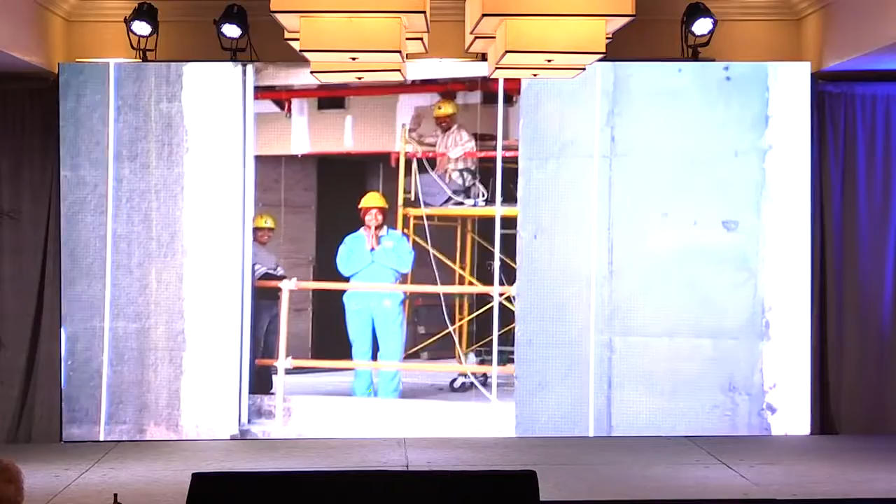Here we go. I'm now 1,000 feet from the surface, 2,000 feet. I'm now deeper than the Grand Canyon. I'm now almost at 8,000 feet. And I'm standing at the deepest point on planet Earth. I think this is the most incredible thing I've ever done in my life.

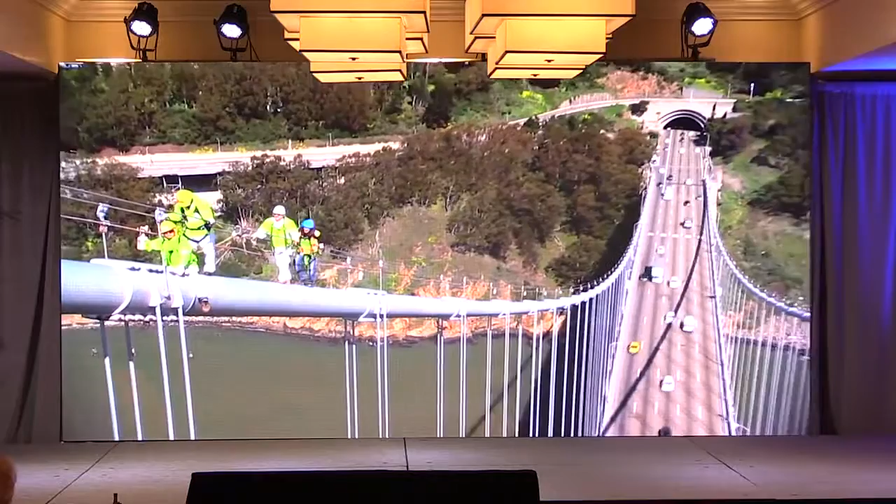My name is Danny Forster, and this is Build It Bigger.

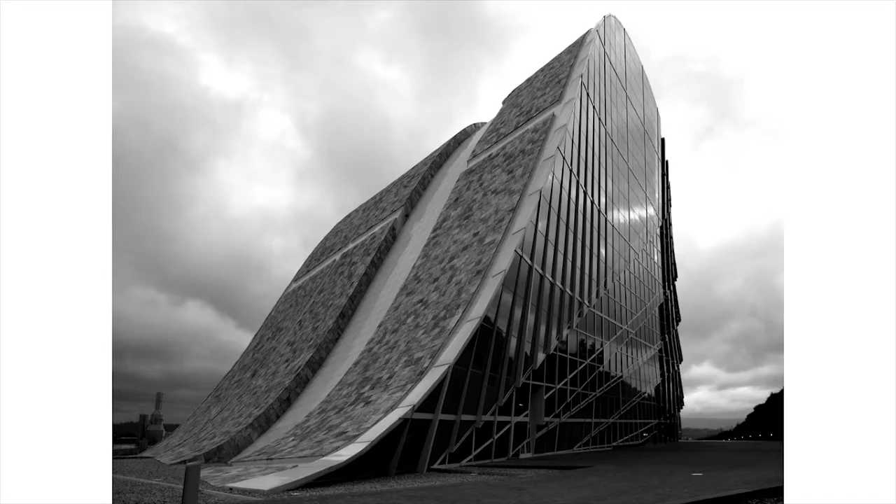This is a project designed by Zaha Hadid in Baku, Azerbaijan. Been to great places like Santiago de Compostela. This is the city of culture designed by Peter Eisenman. And this is one of the longest cable stay bridges in the world in Hong Kong. This is the Stonecutters Bridge.

Now, the show at its core isn't just about showing the biggest and the tallest and the deepest and so forth, but rather it's about actually getting onto the buildings and physically understanding the how and the why, how the engineers and builders ultimately execute these projects and why they look the way they look.

One of the things that we feel very strongly about is understanding how a building is inextricably tied to its place. The culture, the climate, the economic context, the sociology, and so forth. How is architecture a direct result of the place in which it's built?

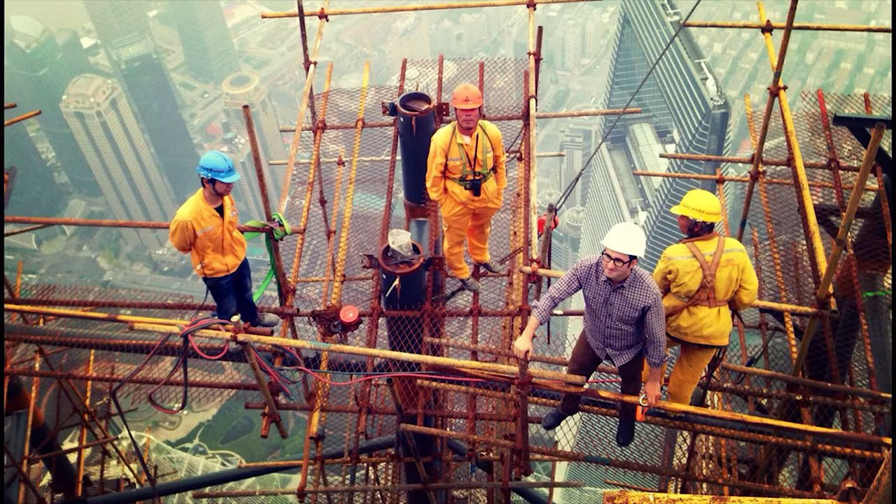A project we did in Shanghai, for those who've been there recently, this is the Shanghai Tower. It's the third of the 3 towers in Pudong in downtown Shanghai. It is the tallest building in China at 2,000 feet tall. And this is an image of us filming the episode. And as you can see, while China has great innovations, they are still waiting on OSHA to arrive.

Just for background, that's the Shanghai World Financial Center. The building looks like a bottle opener. That's 1,650 feet tall, and we're looking down on that building. So that's about 2,000 feet tall. And they're looking forward to getting harnesses at some point in the near future.

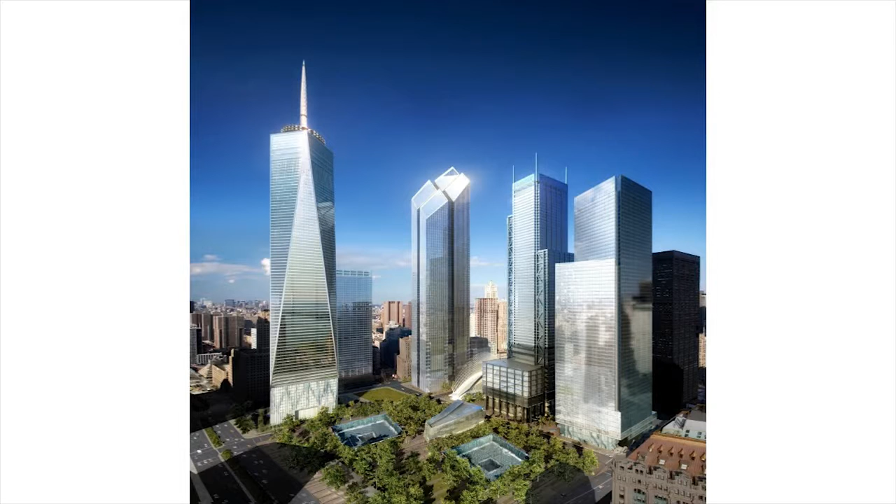In addition to being in front of the camera, I've had the opportunity to spend some time behind the camera. And a few years ago, got to create a documentary series with Steven Spielberg and the Discovery Channel called Rising, Rebuilding Ground Zero, which is a 6-part film that looked at each of the major projects at the World Trade Center site, explaining, again, not just how these buildings were built, but why do they look the way they look? What meaning is embedded in the design of these buildings that make them inextricably tied to the event of 9/11 and also the development of a new Manhattan?

And just by way of example, one of the episodes looked at Santiago Calatrava's transportation hub. Now, who's been to this building here? Who's seen it in New York? Been through it, right? Amazing, slightly overpriced, but very beautiful building in downtown Manhattan. But have you asked yourself as you walked by it, why does it look the way that it looks? Said more specifically, look at the wings on this building. Pretty asymmetrical, right? Why go to the trouble to design a $4.5 billion train station, crank the building off the New York City axis, which produces asymmetrical ribs in the ceiling? Why do that? Any thoughts? Anyone?

Seemingly arbitrary, right? Very expensive choice. Well, if you look at the building, you can see it's been cranked at a slight axis, thereby putting it too close to its neighboring building to the left, which produces short ribs on one side and very long extended ribs on the other side, which is beautiful.

Now, the reason the ribs are cranked the way they were is because this isn't just a train station, but it's the transportation hub at the World Trade Center site. And so while every day during the year these beautiful shadows come into the space, they wanted a memorial in light, one that could never be changed. And if we remember 9/11, the sky was so blue and clear that day.

And so every year, heretofore at 8:46 a.m., which was the time at which the first plane hit the first tower, when you enter this building, instead of seeing shadows as you do at an angle, every single year for just a moment, shadows inside of this building will be symmetrical down the center of the spine of the building just for that moment, and then it will go on the rest of its day.

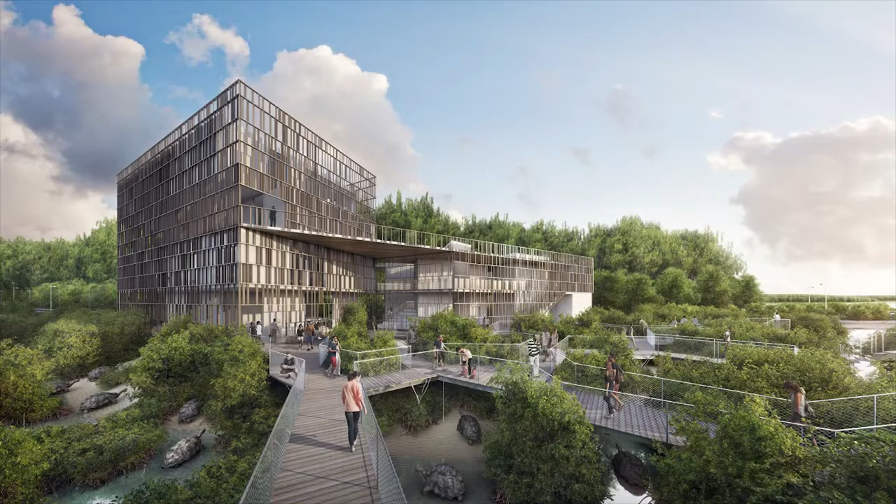Now, in terms of the work that we do architecturally, which is what I'm going to talk about today, my practice does a wide range of work from cultural buildings. This is a museum of environmental history in the Seychelles. This is a museum of ethnography in Budapest.

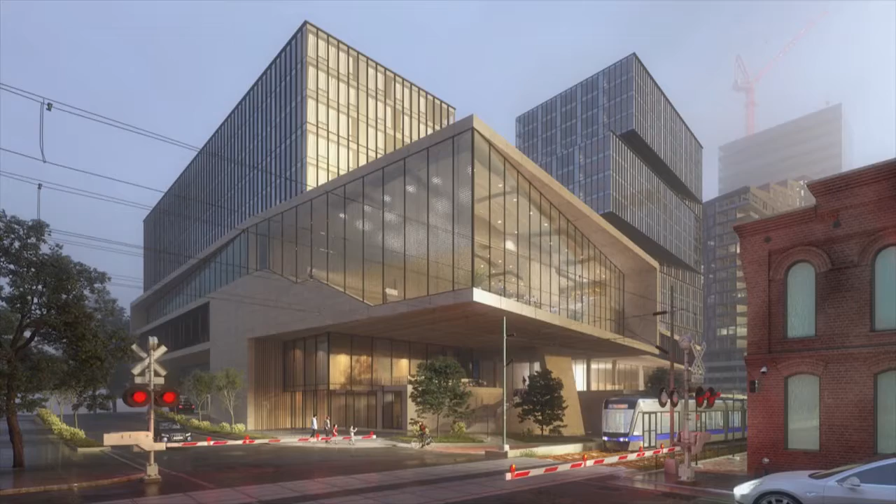This is the first building in a very large 11 million square foot master plan in downtown Charlotte called First Ward, which is under construction right now. We do housing and a whole host of stuff, but our practice has really focused on hospitality the past 7 or 8 years.

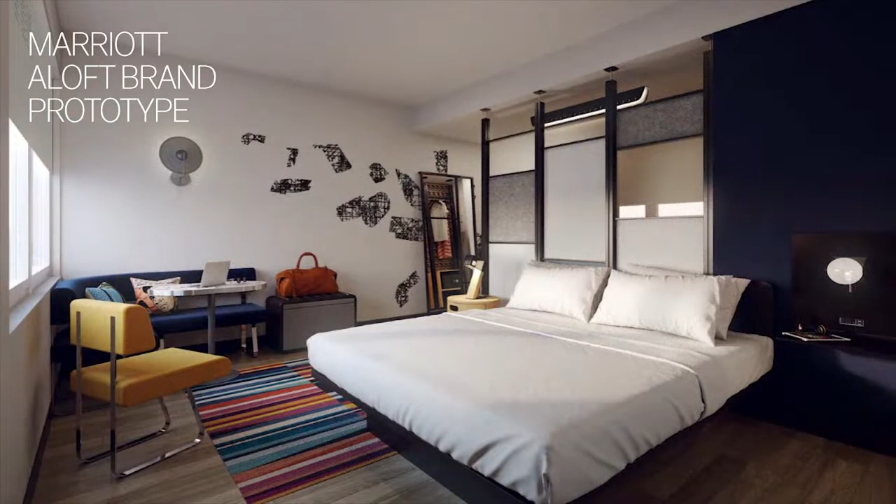Recently, as Michael mentioned, with the acquisition of Starwood and the Marriott merger, we were really honored to be invited to take the Aloft brand, a 10-year-old hotel brand, and reimagine it, create a new prototype, and relaunch it. And actually, we're building now the first brick and mortar one right now, but all Alofts are part of the Generation 4. This is a design that we created.

But what I want to talk about is take a slightly deeper dive into 3 projects right now, 3 hotels in New York City, and really talk about our journey to modular. Not to say that it's the greatest thing, it's faster, it's cheaper, it's the future, everything's fine, but to kind of show you how we honestly came to arrive at being modular architects and be candid about the struggles that got us there.

This is a project we completed about 2 years ago. Very proud of the building. It's the World Trade Center Courtyard Marriott. Won the ALIS Award for Best Development 2 years ago. Sold shortly after its opening. Kind of interesting, compelling building just south of Tower 1 of the World Trade Center.

So there's Tower 1, there's Tower 4. Just south of Tower 4, if you look, there's our site. So we like to think of ourselves as Tower 4.5. And I say that kind of affectionately in the sense that for us, it was a real important opportunity, yes, to create a great hotel, but to find a way to connect this building to the master plan of the World Trade Center site and make it part of that campus.

And the way we did that was, in a sense, saying the World Trade Center ends here. And we literally designed the building to have a very austere stone south facade that said, that's old Manhattan and that's new Manhattan. And there's our building that defines that southern edge of the campus. You can see it right there, quite literally.

We've got kind of relentless square windows on one side and a very, very different facade to the other side. So the building sort of speaks 2 languages, old New York to one side, and then a very dramatic, crisp, taut window wall looking to the north.

You'll notice the building cantilevers over its adjacent neighbor, which for those of you who build in tight urban areas, we oftentimes come up with crazy gymnastics to get an additional room into the plan, right? We call it FAR, floor area ratio, but at the end of the day it's how much real estate can I squeeze onto the site to raise the profitability of the building. It's that simple, right?

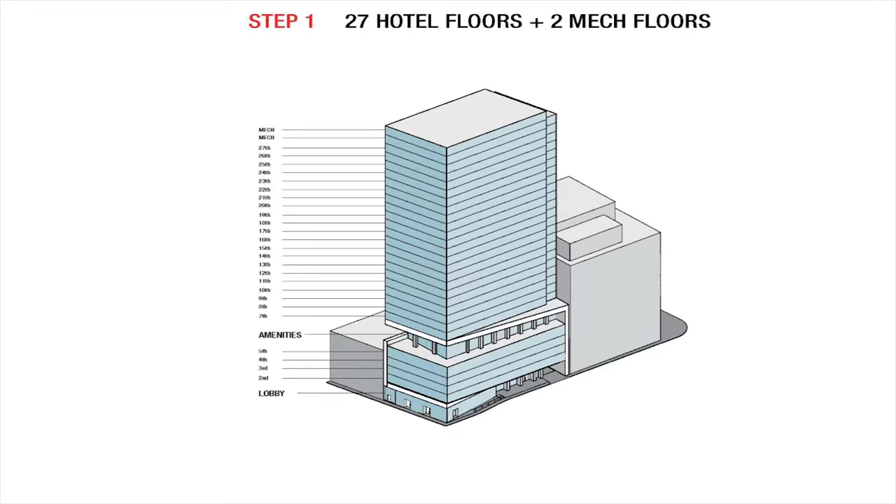Then you can set the building back. Once you set the building back, it makes for a nice, slender, elegant, efficient hotel tower. But the problem was our podium, the first 5 stories of the building, were really fat. And big, fat, long hotel rooms don't make more profitable hotel rooms. They just oftentimes can be wasted space.

Quite specifically, if you look at the plan of our rooms on the south side of the tower, we ended up with a queen-queen or double-double condition that had a 345 square foot room, which I'll be honest with you, in New York City, that's too big. We get away with murder. We've got the Bowery Hotel here. The Pod Hotel, you can get away with 86 square foot hotel rooms.

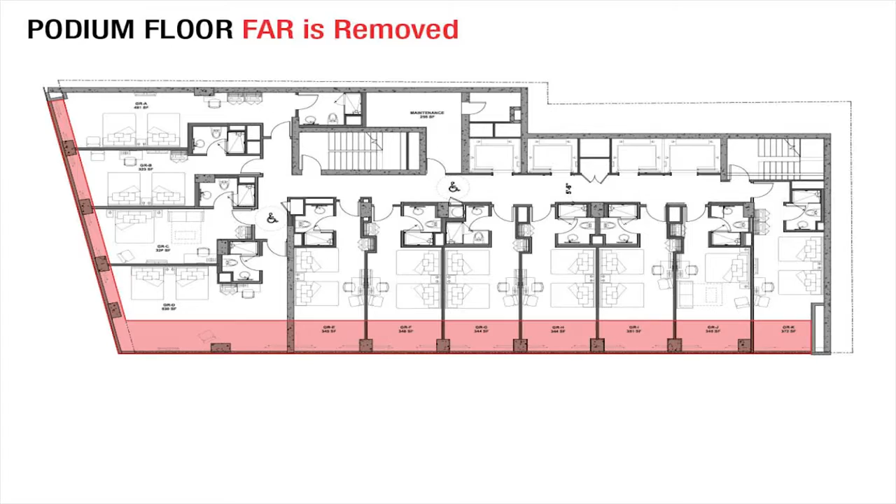But my point here is the argument was made that could we find a way to compress the hotel room, to actually pull that room back and not use up that real estate? Well, the problem was it's against the law.

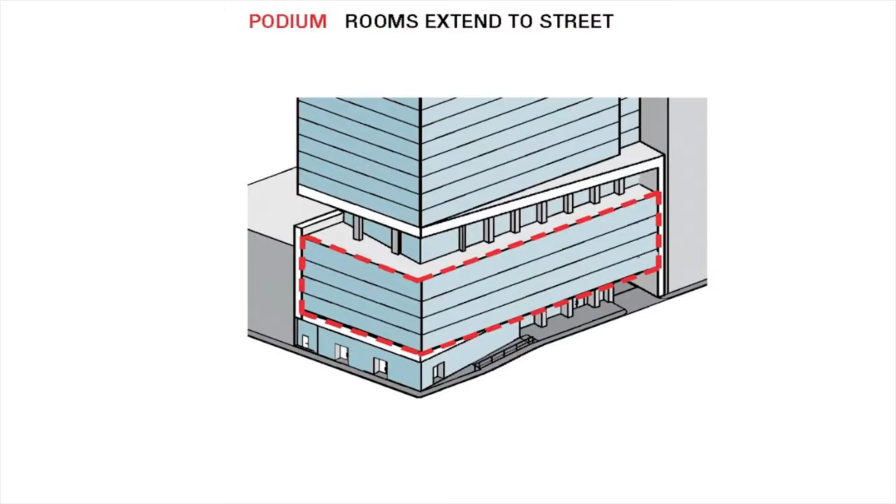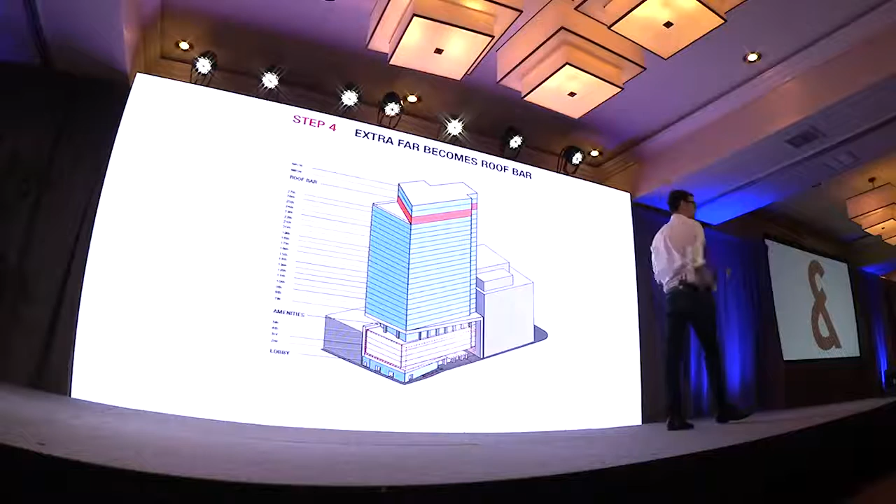So what do we do? We chopped that bit of real estate off just a little bit from the west side of the building, and we said, okay, if we just took that real estate, that 3,500 square feet, and we yanked it off the building, reshaped it, put it on top of the building, set the building back, you could create an amazing rooftop experience with a triangular outdoor space with an incredible view of the World Trade Center memorial pools. That would be great.

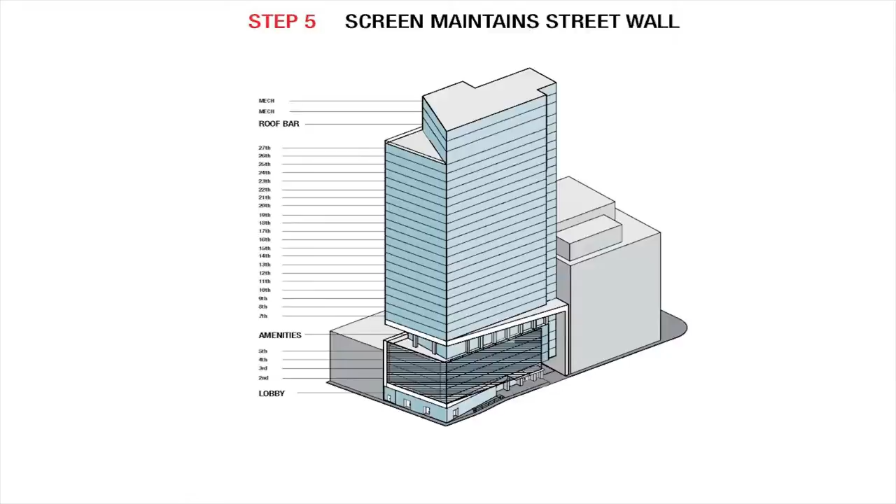The problem is, we've just broken the law because the city says you must hold the street wall. The problem is the city also says if you put a wall there with a hotel room behind it, that's not legal light and air, that's not a hotel room. So our challenge was, how do you produce something that is both a window to one group and a wall to another? Literally two diametrically opposed things.

And what we came up with was this. It's an algorithmically generated cantilevered screen wall made up of mesh. The mesh is 50% opaque and 50% transparent. There's 50% coverage of the mesh, therefore 50% open. So one group said you can't be more than 50% covered. One group said you have to be no less than 50% covered. Turns out we had one solution that satisfied both groups.

It's an interesting, bizarre way to wrap the bottom of a building. Produces a kind of interesting design. Each and every single piece was subtly shifted such that every operable window still has clear access, so you can still take your Instagram photos. And in some cases, you could make the argument that it's a kind of interesting architectural detail from inside of the rooms. Now, I show this just to say that it worked.

It took 6 months. If you try and apply for a screen wall in Manhattan right now, the Department of Buildings has like my face on the wall and will say no. And I say that because this is a bit of a unicorn.

We did it once. We as architects were able to make a good building that followed zoning, that helped our owner get more additional FAR, add rooms, add a rooftop bar. So as architects, we could participate in the process beyond just making it beautiful or effective or operationally sound. But this is hardly something I can do a second time. We did it once. So how do we then, as architects, find a way to contribute to the bottom line beyond just making the building work?

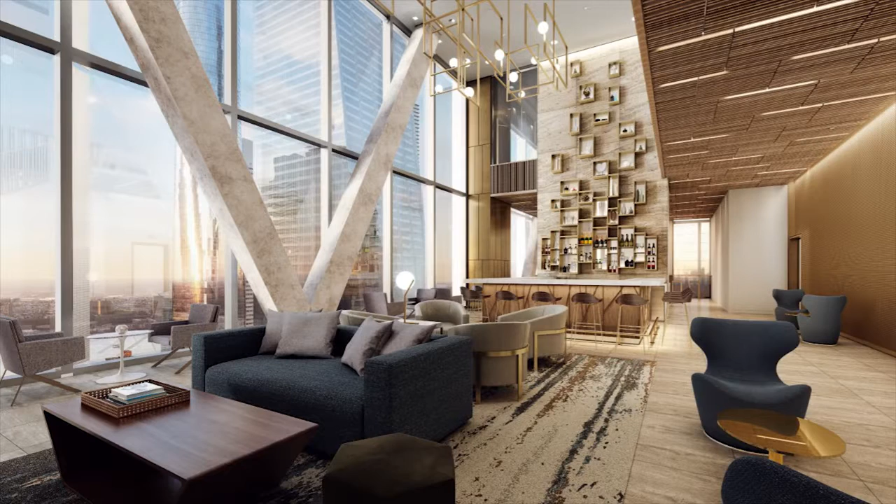It's got a beautiful, large, upper double-height space at the top of the building with great views out to the west, and an interesting flipped-up column on the corner to create a double-height look facing north. But at the bottom of the building, we ended up literally removing as much real estate as we could to have as small a footprint as possible where the building met the ground, so we could take that real estate and redistribute it to the top.

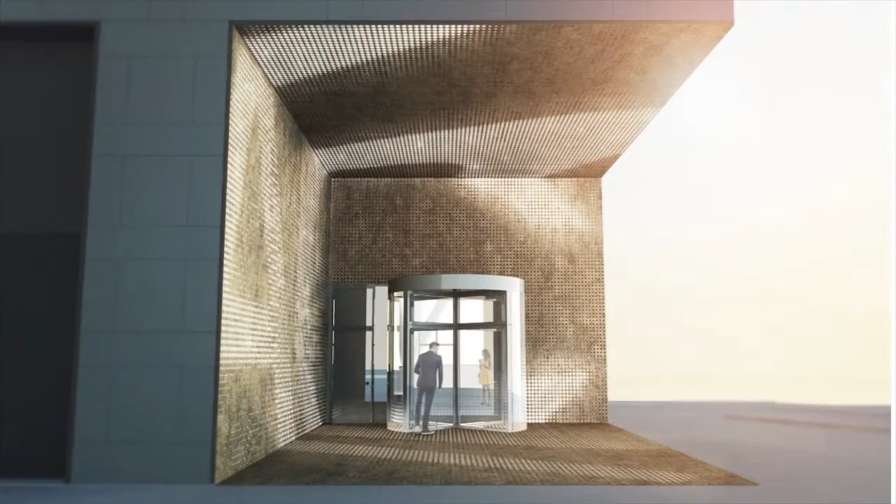Nowhere is that more dramatic than at the entry, where instead of having a canopy, we literally have a missing tooth of the building, a missing leg of the stool, where you move under a double cantilever, 20 feet tall and 28 feet long, to come into the space.

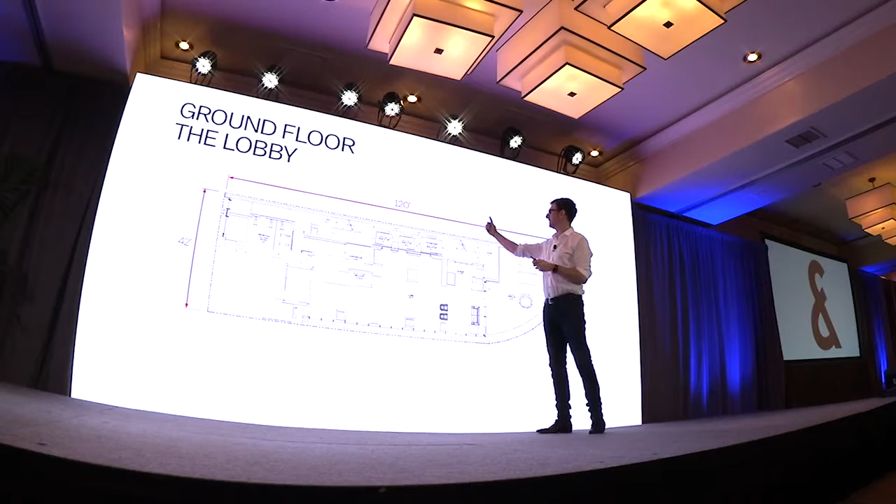All of that is a preamble to say this: when we inherited the site, these were the dimensions given to us—42 feet wide by 120 feet long—and the developer didn't have the ability to have windows on that side. So in a sense it's a three-facade building, 42 feet wide, and it'll be a cast-in-place concrete building. From that moment, when those three decisions were made, my hands were kind of tied.

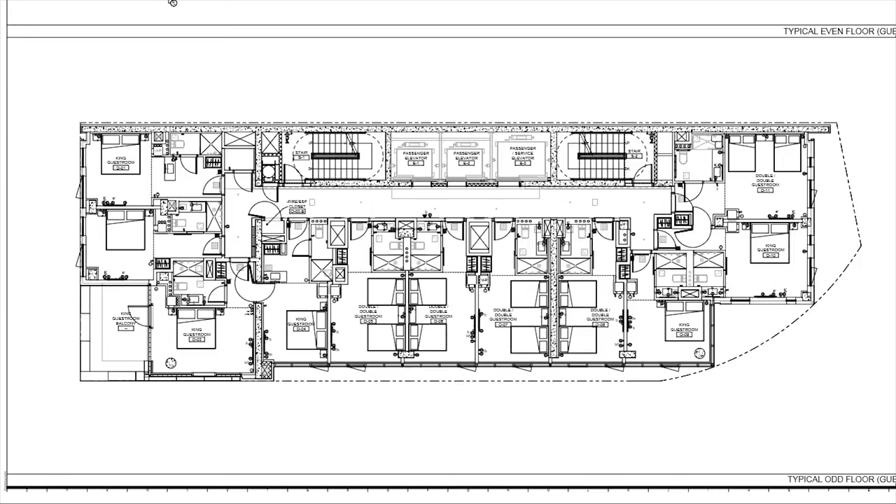Yes, we could do good things—we could value engineer the curtain wall, we could find clever ways to make it work. But when you look at the guest floor plan and see where the elevators are, the stairs, the rooms, the size of the rooms, the corridor, I'd like to say I had a lot of flexibility to make a really good plan, but I didn't. The logistics of the site, its size, and the methodology of building it drove the entire process and the budget of the building.

And we're grappling with this project's budget for that very reason. So as an architect, you're kind of frustrated—you wish you could do more. In this case, building it as we did, we couldn't. We did the best that we could.

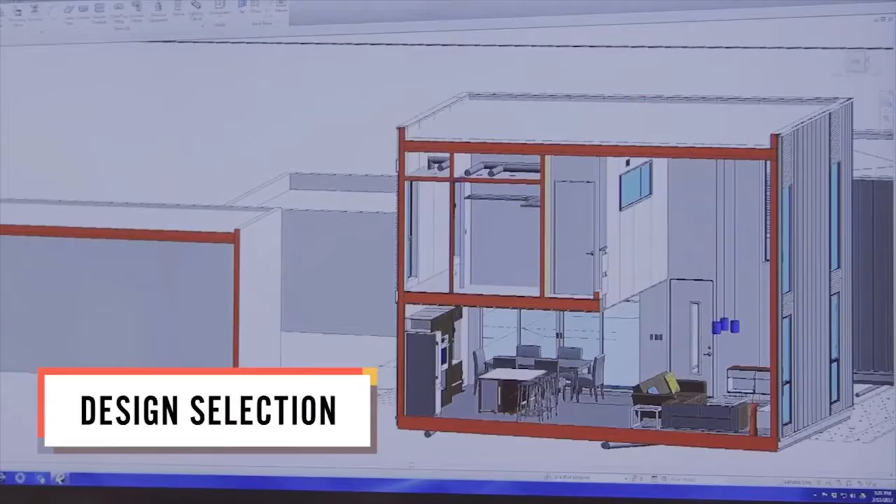Now, modular, of course, would make a lot of sense for a lot of reasons, and I'd been curious about it for a long time. I've actually been working on a new TV show about modular—this is what modular America does, with wood frame single-family homes. We've got a great history in this country of doing wood frame modular. In this show you meet the family, they tell you what they want, we design a house for them, tell them it's going to be great, show them the house, and they agree. We then build it in just a matter of weeks—a truck comes to the house and we drop the core down.

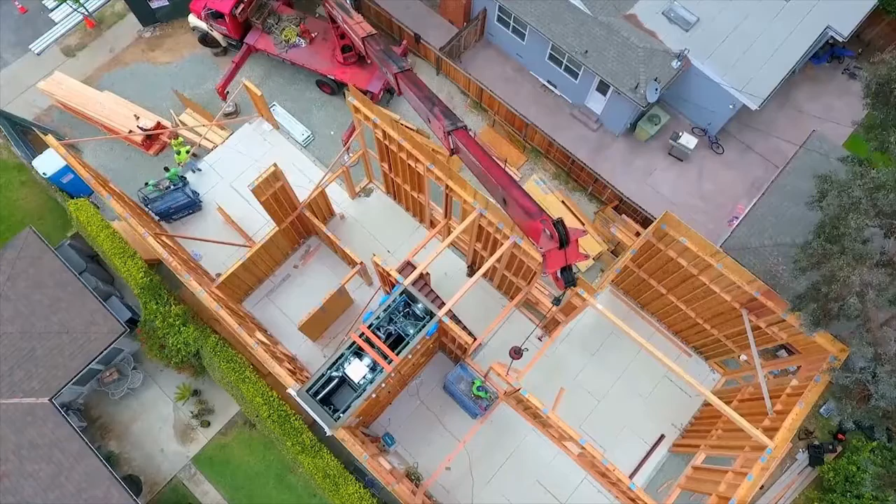This core is quite cool—it contains all the MEP, literally all the infrastructure, in one shot, and the bathrooms and kitchen click into it. The very same day we stack up a series of walls, and 14 weeks later you have a house. It's great, totally cool, and it works. In America we've done this for quite a while, with different companies offering different capabilities for wood frame modular, and it's been very successful.

Now, in the work many of us do, once you get above the concrete podium four-story building for high-rise urban infill development, wood frame is not an option. So if you're interested in high-rise multifamily architecture, you have to look at steel volumetric modular, and America hasn't had a very deep level of experience in that area.

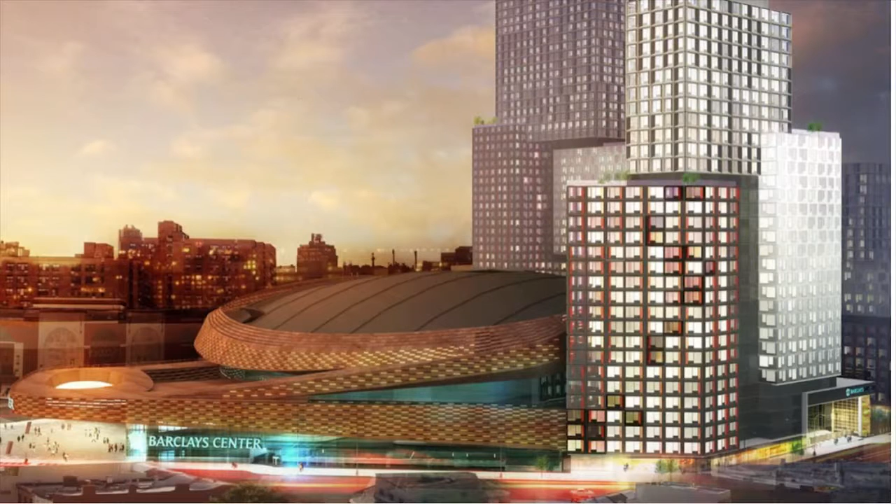There are a few projects, and some folks in the audience have spoken and worked on them. This is the Dean Street residential building attached to the Barclays Center in Brooklyn, New York—the first high-rise modular project in America, 363 units, kind of an ambitious way to start. In today's Q&A I'll be happy to talk about each of these projects—there are pros and cons to how they went, but they struggled.

They weren't all grand slams. As you can see the building being erected here - this is the Pod Hotel, and we have folks who've worked on the Pod Hotel in the audience today. It's completed, it's open, a lot of challenges and issues in producing this building, but there it sits and it looks great.

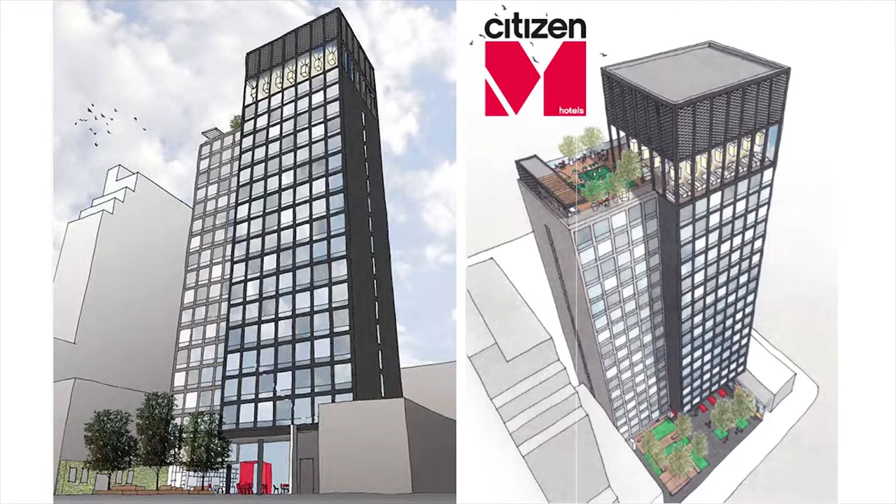This is the Citizen M we heard about in the Bowery today. Actually, my office looks at this building. I think it recently opened, so it's open for business at this point.

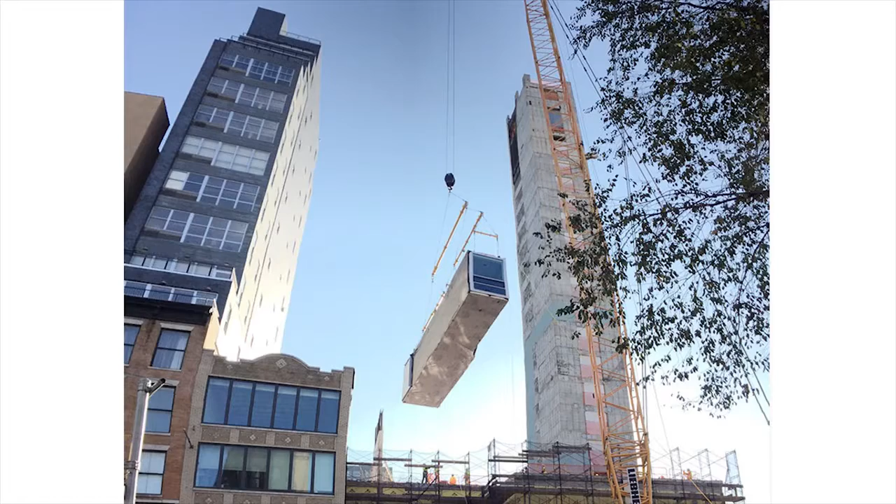Again, a project that had a lot of different challenges and came into fruition. So why, given all these challenges, would we endeavor to do a building that is yet taller, more complex, and potentially more risky? The reality is we believe deeply in this as a methodology, but we also want to be honest that it's really complicated to do. It's very, very challenging - it takes a reimagination of how you put buildings together from beginning to end.

So I'll briefly take you through this project. This is 842 6th Avenue at 6th Avenue and 29th Street in Manhattan. It will be the tallest modular building in the world. Right now it's being manufactured in Poland - in Krakow, we've got about 120 some odd of the rooms in construction, nearing completion. They'll be on their way back to America by boat in January. In New York City, we're building foundations as I speak.

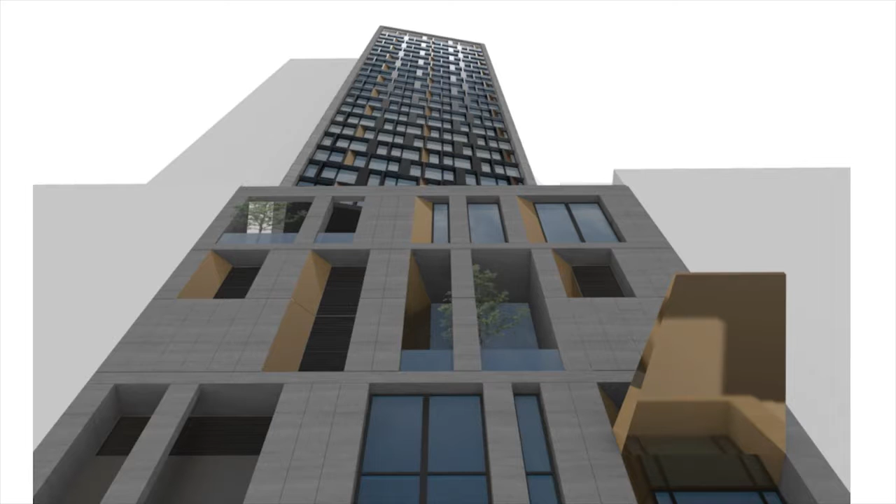So this is an interesting moment in time - we're right in the middle of the project, design is wrapped up, and we're now in the administration process. So there's the building, and there it stands. First thing you'll notice, hopefully it's decent looking, but also that it's actually quite conventional in some respects.

You've got a very tall 3-story podium, and then a tower that rises behind it, cranked at a 14-degree angle. That angle, I promise you, is due to very esoteric zoning requirements in order to create light and air opportunities - it's not an aesthetic gesture.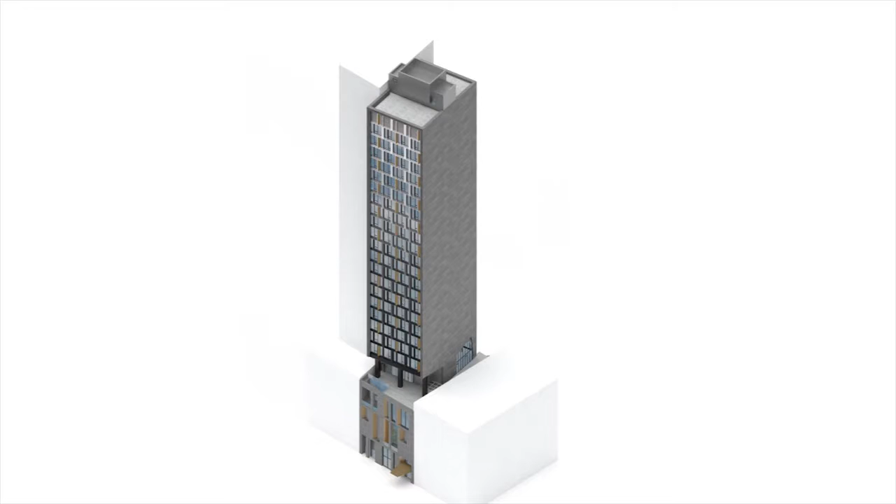But if you look at the tower, in very simple terms, from a modular standpoint, it is exactly what you want in a modular project. Why? The podium of the building is built in New York, the top of the building is built in Poland. I say that because the programmatic breakdown of the building is specific to the methodology.

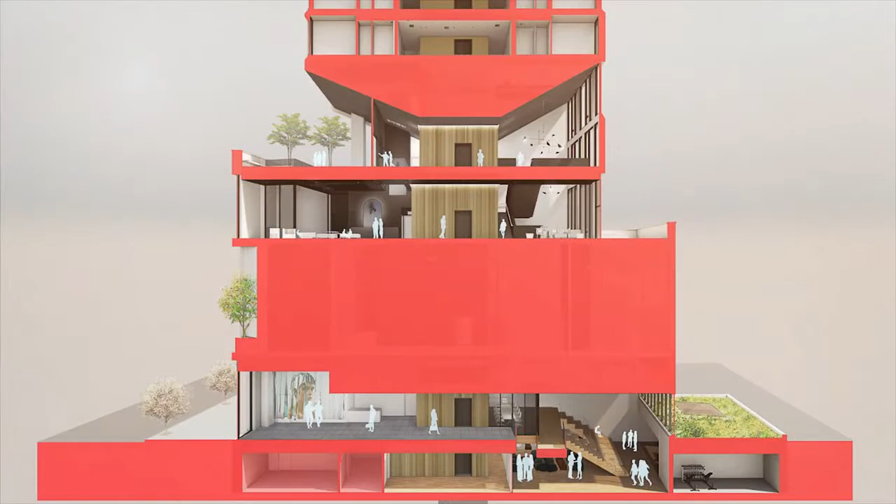By that I mean, in the bottom of the building, where you're building in New York out of concrete, go nuts, have at it. Your amenities program, your back of house program, your idiosyncratic and unrepeatable program, double height ceilings, sloped ceilings, indoor and outdoor spaces - we are totally unconstrained. We can design as we've always designed and make an amazing, compelling public space with great food and beverage opportunities.

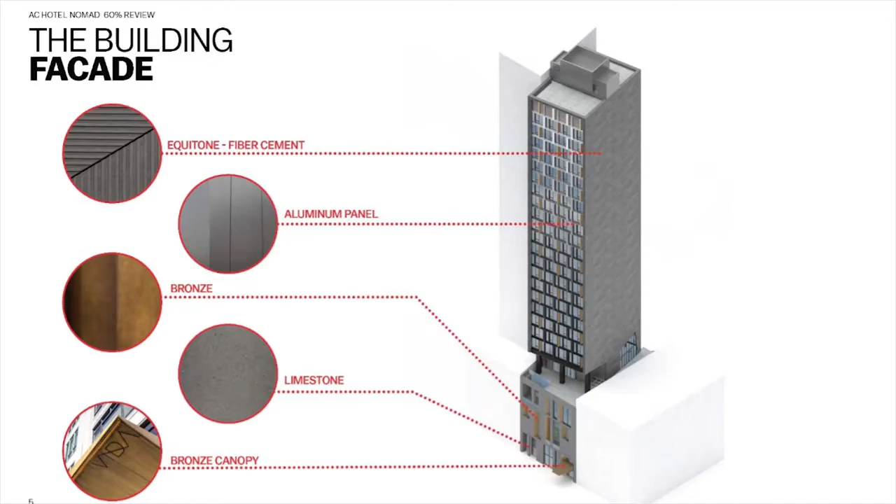That's fine. But when you rise above that transfer slab, the building becomes relentlessly repeatable, as absolutely automated as possible. You want that building to be tuned to be fabricated in a shop. From a facade standpoint, you'll notice there's a kind of variegated metal facade, a stone facade to the south, and a stone facade on the podium. But when you look at this building, the question I'd ask all of you is: does it look modular?

If I'd said to you it's a modular building and showed you that beforehand, would you have known? One of the things we feel strongly about is that at present, modular doesn't actually have - in this room we all think it's a buzzword, but outside of this room, people think it's a mobile home. That optics break is a real issue. So from an optics standpoint, we firmly believe this should be read legibly as an iconic piece of great architecture. It should be a great hotel - it should be an amazing property, irrespective of how we built it.

When you've gone through the hotel experience, we'll tell you how we built it, and we hope you giggle - you can't believe it's true. Now, the way in which we're able to break down what is oftentimes the critique of modular, that it looks like a bunch of stacked boxes, is twofold. Number one, you'll see the facade starts out as a kind of dark metal, and as it rises up, that metal gets slightly brighter and whiter.

The idea is a sort of optical forced perspective. The building seems taller than it is.

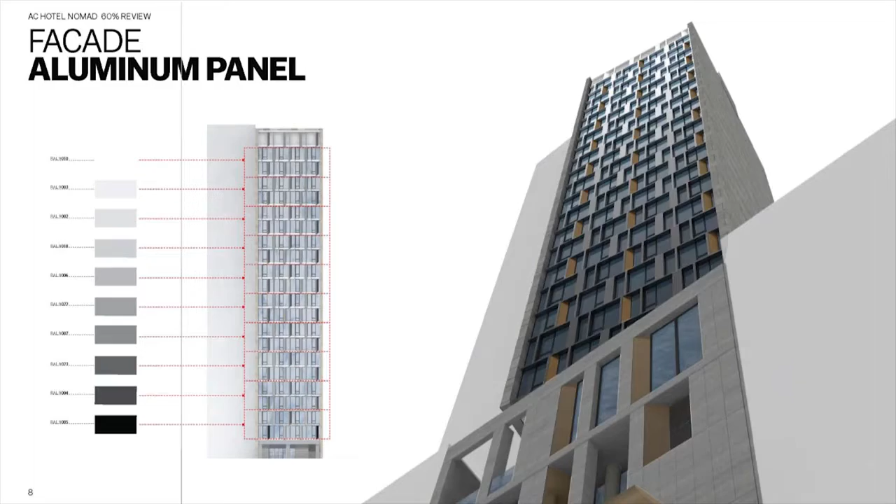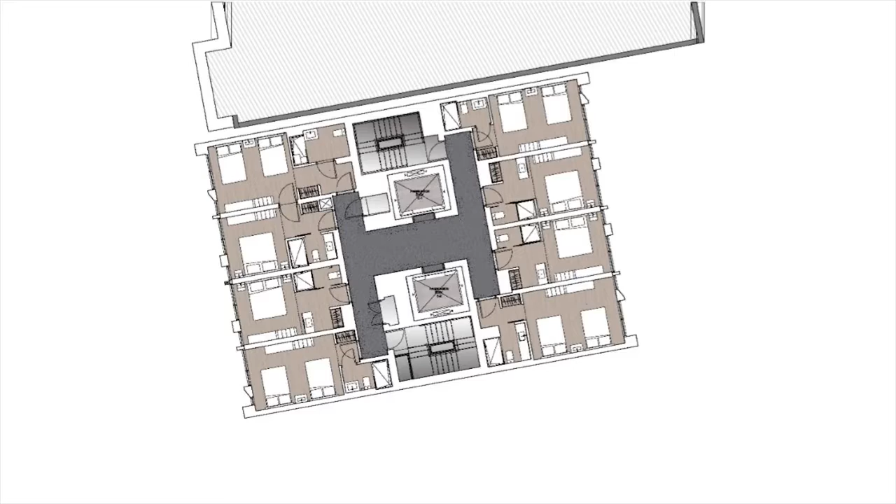From the tower of the building, what's important to note is it is rigorously symmetrical. And I'll be honest, this building did not start out as a modular building. We actually were designing it conventionally, which I wouldn't recommend. If you're doing modular, start modular. But we had been designing buildings before, and that Hudson Yards building had been such a complicated building with so many facade types and fussy geometry. We wanted to create something really simple and clean just for our own sanity, and it lent itself to a modular opportunity. The rooms copy each other at the corners. They're not even mirrors, just rotated versions of themselves.

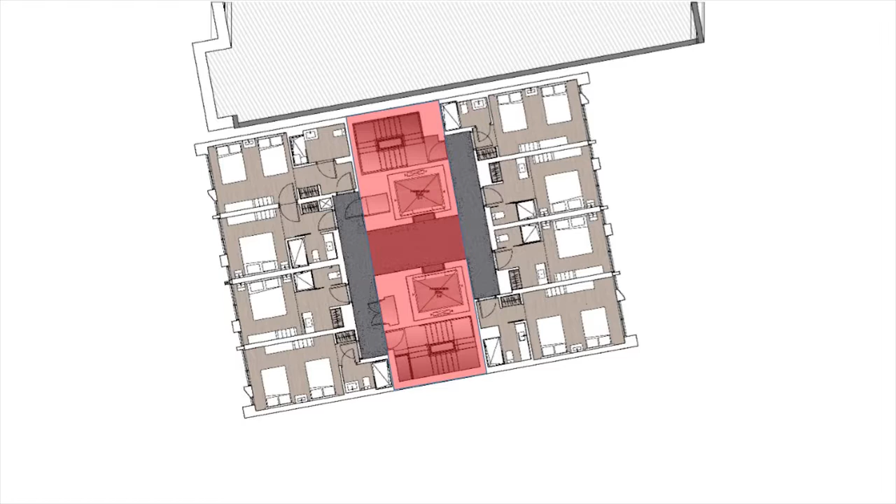If you look at what's colored in red here, that is what we build in New York City, and everything else is what we build in Poland. So the structural spine of the building, the elevators, the stair towers, and a very slender piece of corridor space is cast in concrete. And as you'll notice, the hotel rooms come with their own corridors, which is a very common strategy for modular.

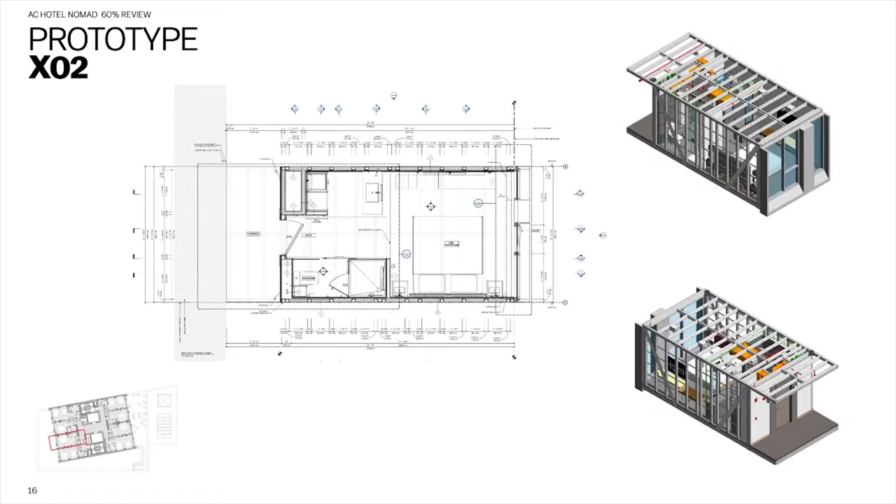If you look at a king room right here as an example, you can see the room. People always ask, is it a shipping container? It's not. It's a bespoke steel object, HSS steel tube, structural steel on all six sides of the box. The mechanical systems, the facade, the FF&E, the ID, everything is in this thing before it leaves the factory. But you'll also notice that the corridor comes with it as well, which is a critical piece of the puzzle.

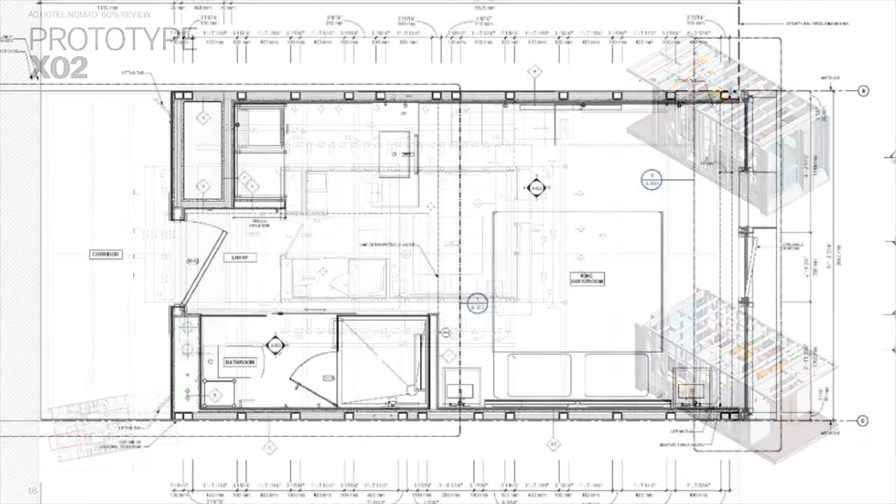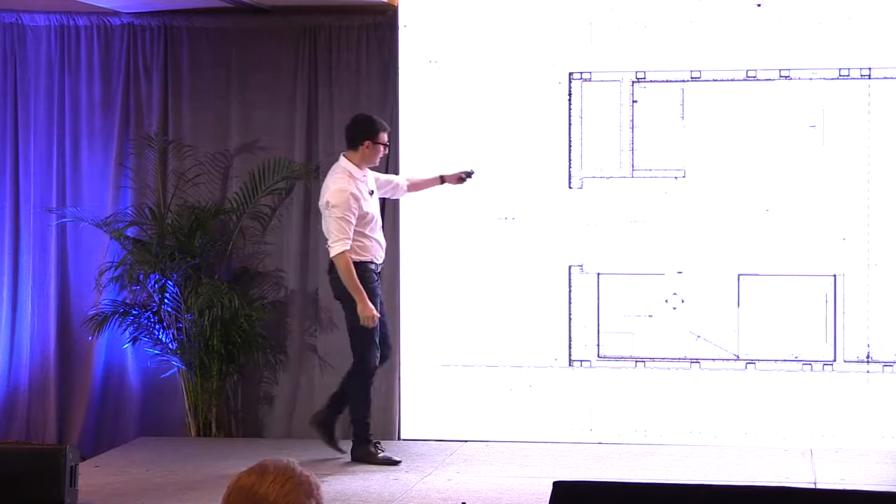If we take a slightly deeper dive, a few things to note: number one, there's no mechanical shafts in the body of the room. When you design a modular building, you pull all of the mechanical infrastructure to the corridor located here and here. Why do we do that? Because when that thing leaves the factory, the door is locked.

When I say the door is locked, I mean it's actually locked. The GC on site doesn't get a key. So when the mechanical contractors, the electrical contractors, or the plumbers arrive, they take the elevator, they walk into the hallway, they make their connections, and then they leave. They're not actually allowed into the room. So the mate line work happens in the corridor. The room is finished in Poland, but the corridor is finished in New York later. So they can have as muddy a boot as they want. It doesn't make a difference. They make those connections there.

Now you'll also notice the aspect ratio, the geometry of the shafts are quite skinny. That isn't designed specifically to fit the pipes perfectly, it's actually designed to fit someone's back and reach more comfortably. The most critical mate line work is connecting the plumbing of one to the plumbing of the next. Oftentimes on some projects the shafts are quite deep, meaning the workers are reaching quite far, often having to tie off. By compressing the width of the shaft space, the mate line work happens directly next to your eyes. You're not tying off, you're able to really get your hands around the work.

The width of the building, yes, of course, is designed to fit a bed and be a great hotel room, but it's also designed to be optimized to be stacked four wide in a ship.

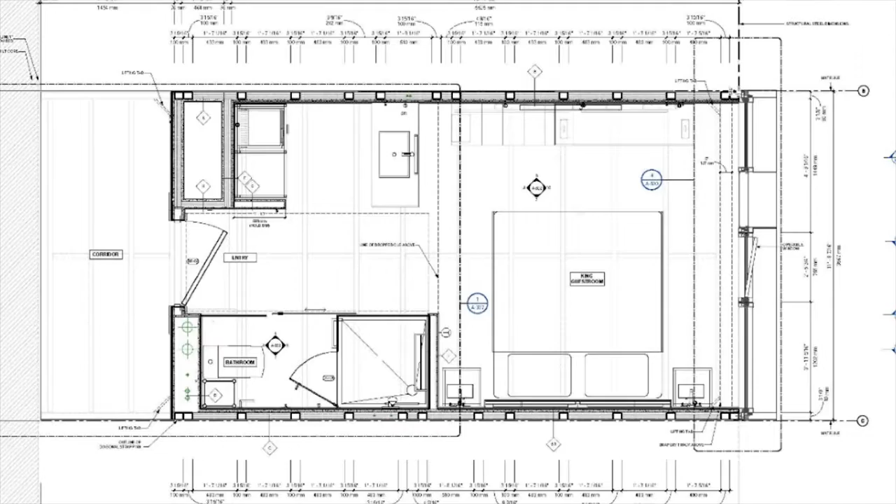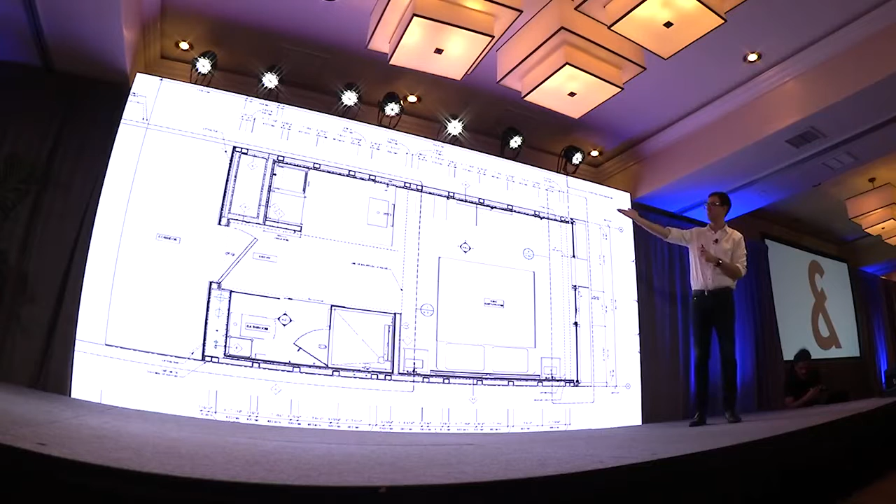When we ship this building, the entire building comes in one shot. By being 11 foot 8 inches, that allowed us, as we stack four wide, to optimize it for shipping. So you're making decisions with the design of the building based upon shipping, turning radius of trucks, the allowable width the Department of Transportation lets you have on the Manhattan Bridge, the reach of a person installing a pipe shaft. These limitations or constraints become the driving force that helps shape the design of the building, separate from all the brand requirements.

Now, what I'm showing you here are our manufacturing drawings. A couple things to note: if you think about the typical life cycle of any project, the prototype we build for this building happens during the back end of SD, the beginning of DD. So you're still figuring out the building in very generic and broad terms, and simultaneously your team has to be making decisions at this level and creating documentation of this specificity.

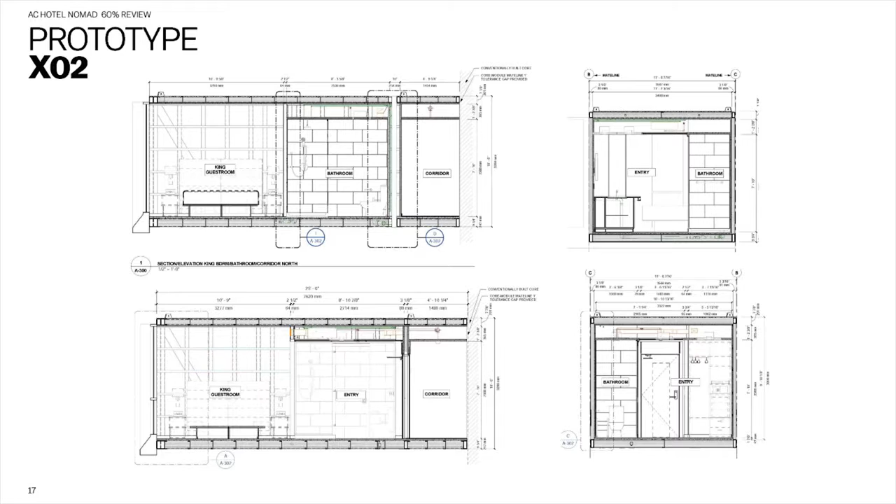So it's a complete shift in how you think about your labor force and your time when organizing a building like this. And I say this to be clear that we're not just talking about the building being designed loosely—we're talking about full mechanical coordination three-dimensionally happening in each unit. Because when you build a prototype, it's not an aesthetic mock-up, it's a functional prototype. It could be the first room, so in this case, the Mitsubishi VRF system. Your mechanical engineers have to be this specific and this final at this point in time.

So this gets us to the first challenge of modular: having to make hard choices that are expensive early in the process, and having to build consensus among people who haven't done this before. It's really hard.

So if we could jump to a browser for a minute, I want to show you guys a technology that we developed for this project, which we now use for other projects. It was a way to help us help our developer and help us make decisions, get brand on board, and think about the financial realities you have to commit to at a much earlier point in the process.

So what you're looking at, and we heard earlier today there was some talk—oh, can we throw it on the main screen or no? We heard some talk earlier about using VR and so forth, and VR is great. We love VR.

So if we just kind of look here for a minute, this is the guest room, and you can fly around here. Gilles, if you would, give us a little tour of the space. You can see the room—good-looking room, bed, TV, facade, FF&E bits, some custom art. This is the specific piece of art on the wall. So you're looking at the room to a T.

And so VR is quite common—many architects use it, many folks use it, it's a good visualization tool. But for us, we weren't just saying does it look good. We had to figure out what does it cost, and can we specify everything and get it bought on time given the schedule.

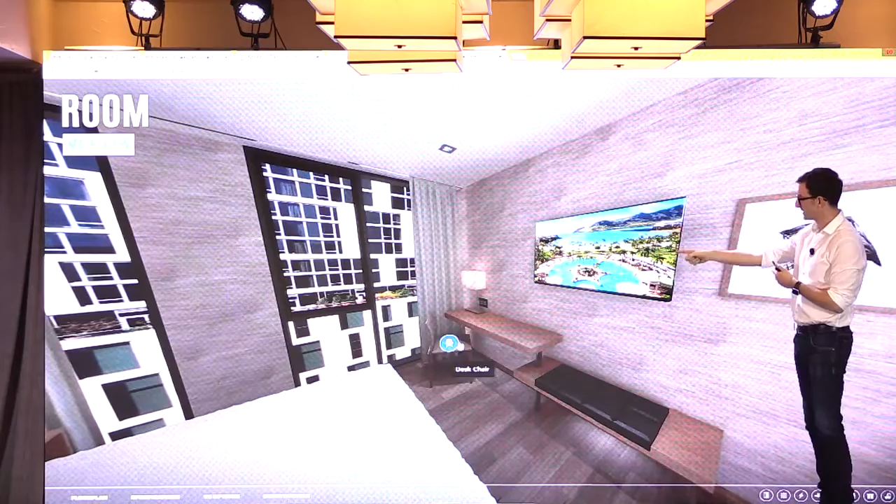So if you roll your mouse over, you'll see things start to light up. If we click that for a minute, that's the chair. One of the things we're always concerned about is the spec doesn't get followed, right? We all know that struggle. So here what we've done is we've taken the spec—because we're all in Revit, everything's in 3D—and embedded it, which is otherwise a big old stack of PDFs. We've embedded the spec and the Revit model into the VR, so anyone looking through this can feel the room, taste the room, but also a specifier can really be sure they're buying exactly the right thing.

If we jump out of here, every single item—if you roll your cursor over it—lights up with its spec. That's fine. But one of the other issues is making decisions financially, because the room you're choosing, you can't make changes later. I mean, you can, but it's a nightmare.

So you have to get your ownership group to commit 1,000% to these products, to this design at a very early point. Remember, we're at like early DD. So Gilles, if we just look at the front door for a minute.

So here, if you look at the door, you've got this nice wood panel and this nice ceiling panel. The question was, is it worth the money? Does that entry experience require that wood-wrapping ceiling there? So if we kind of look up for a minute, pan up for a sec.

And if we click on VE for a minute, on the bottom you can see we embedded some of the options we were studying. So if we click on, let's say, ceiling detail, because in modular you have the cost of everything at the top of the project because you have priced this thing, right, because you have to go into manufacturing, you are able to look in real time at the cost.

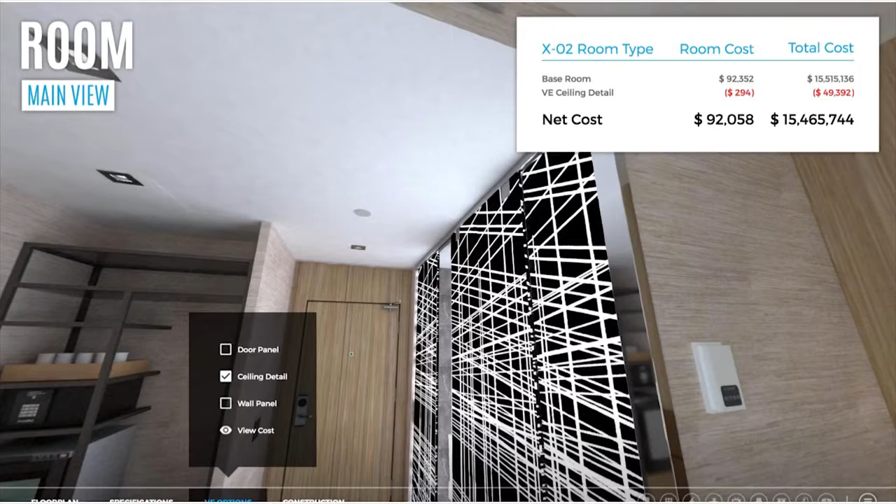So if we take the door panel off as well, you can simultaneously understand the architectural, the guest experience, and the financial implications. And we spin back over to the bed, Giles.

If you just pan over to the bedroom, you can see that wall panel behind the bed was also a big item in question. If you pause there, thanks, advance forward, that too can get pulled off the room as well. So you can click on the wall panel there, remove that, and so on and so forth. So you can get the gist, right?

And if you just close that up for just a moment and click on specifications, to the left, yeah, perfect. And hit view all. So every piece of the spec is embedded into the VR.

So it's slightly clumsy, but we built it for this project. It's not like an off-the-shelf product, but it gives you a sense of how you can take your spec book, you can take the architectural vision, and then say to your ownership group, this is what you're building.

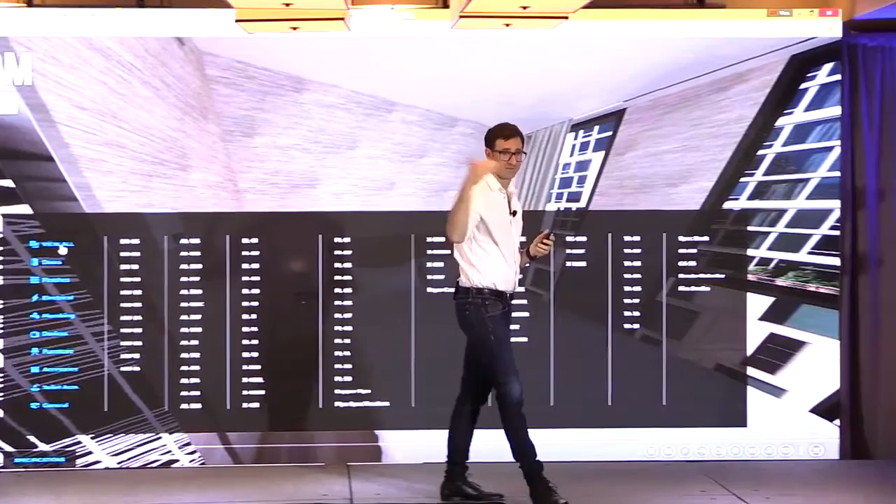You can give this VR out to your contractors as well as to the modular fabricators and say, does it look like this? Because as we heard earlier, those 2D drawings are great, but when you fly, in our case, when you fly 25 people out to Krakow to review this thing, you're making commitments that once you say go, 168 of them are being made shortly thereafter. So getting that model room right, there's a little less flexibility than normal projects.

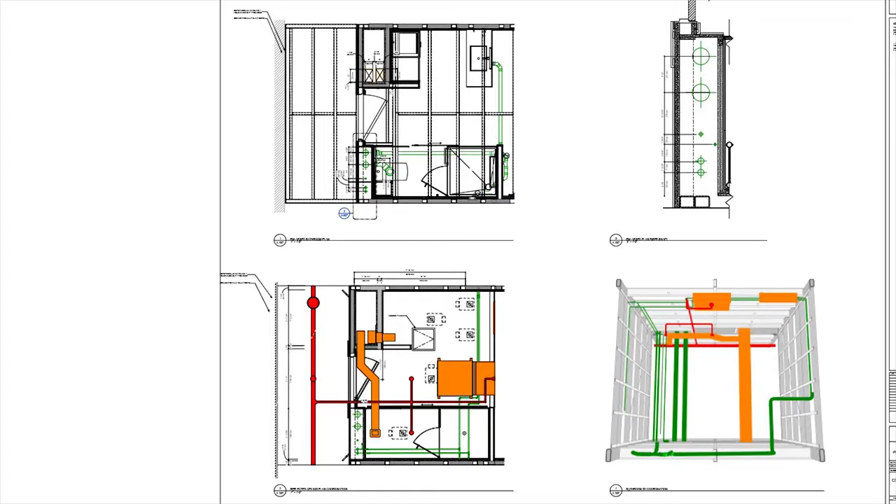That's great. If we could jump back to the PowerPoint, that'd be wonderful. So this is just one of the tools that we developed to deal with one of the two major issues, which is having to make choices earlier and committing to those choices. And a tool like this allowed us to get ownership, brand, and all the consultants in lockstep at an earlier point in time.

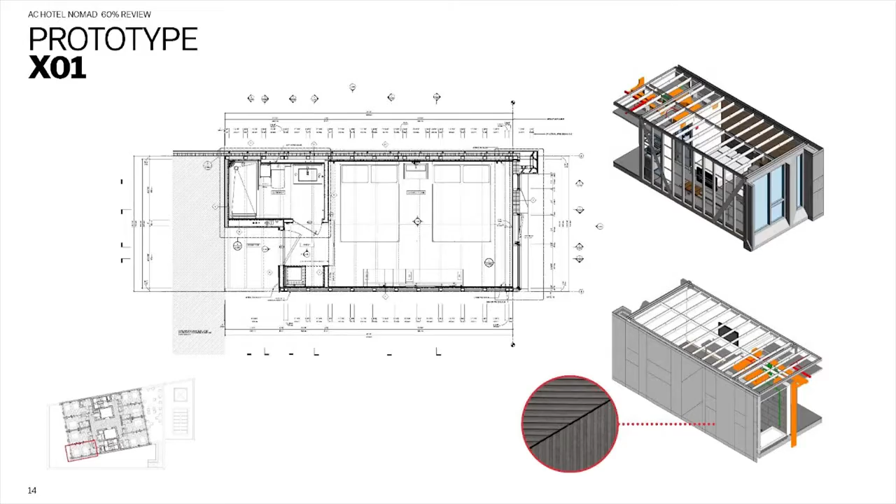Now, so what did it produce? So what I want to show you here is actually the prototype that was ultimately built. We're well ahead in fabrication, but in November of last year, our team, Marriott, and a whole host of folks flew out to Krakow to review the prototype. This was a queen and a king room space, and you can see the prototype there.

Facade is on the building. The cladding, now this is a little bit deceptive. We actually will apply these panels. This is a cementitious rain screen panel that'll get hung in New York City, but the girts, the exterior insulation, the waterproofing, all of that happens in Krakow, and then they just clip the panels on in New York.

And you can see that's a very simple off-the-shelf product called Equitone. Looks great. We happen to rotate that panel. You can see here, each panel rotates actually in the same order. Every time a window panel switches, this switches as well, giving the building a bit of scale despite the height of the stone wall. You can see that there.

So this is the rendering, right? This is what comes out of the virtual reality, and then this is what we ultimately manufactured. So this is the prototype, just to give you a sense, a taste for how it works.

All the art, all the pieces, everything you see is what we're getting, 168 of.

Now, one of the challenges once you go to this point and look at your prototype and you kick the tires and you're comfortable with it, construction administration is really tricky when you're in New York and someone's in Krakow. So that's problem number 2 in modular: how do you QA/QC a project that's quite far away? Some domestically built projects are good, but at this point there are not that many manufacturers in the States who can do projects of this height and size out of steel. So what do you do?

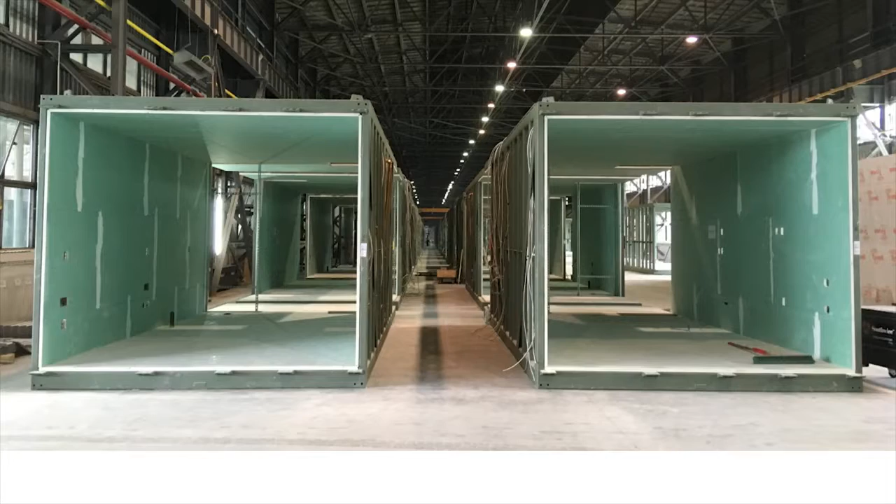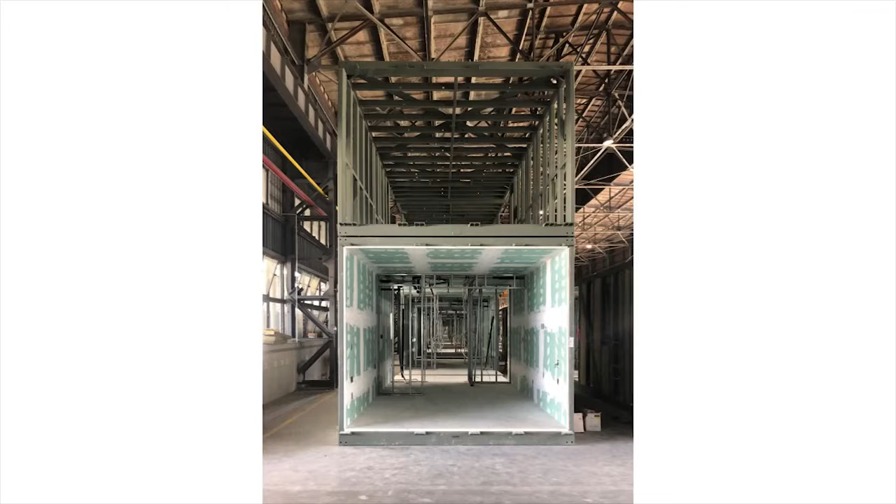And this is where we sit about 4 weeks ago. We had about 108 modules in the factory at that point. We had just begun our stacking tests, which is always encouraging to know it stacks. And as I said, we're going to be bringing them back to America in January.

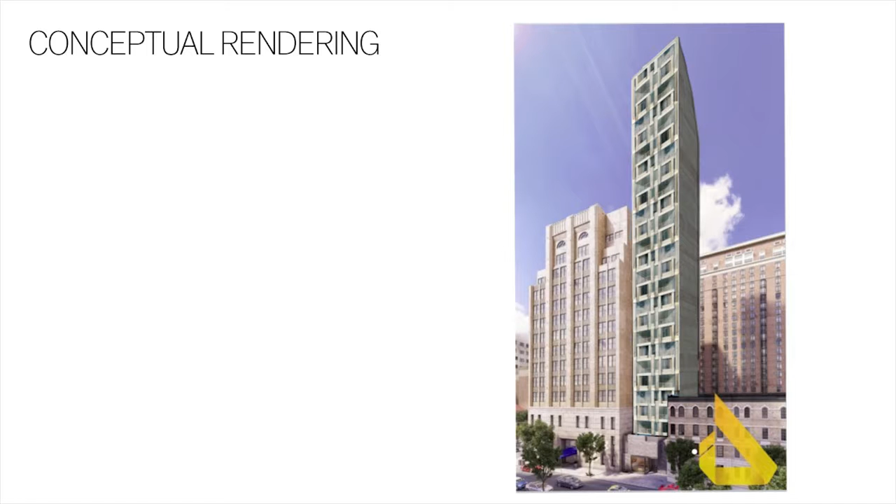Now, I'll say one quick thing, and hopefully it'll look something like this, perhaps a little less dramatic, but hey, it's a rendering. I will say this, we are fully engaged in this process. This is a project we're working on right now in Brooklyn—it will be the tallest modular hotel in Brooklyn. I'm showing this to make the point that this isn't a fluke and isn't a one-off, and folks in the room also doing this kind of work can confirm there are practitioners very engaged in modular construction.

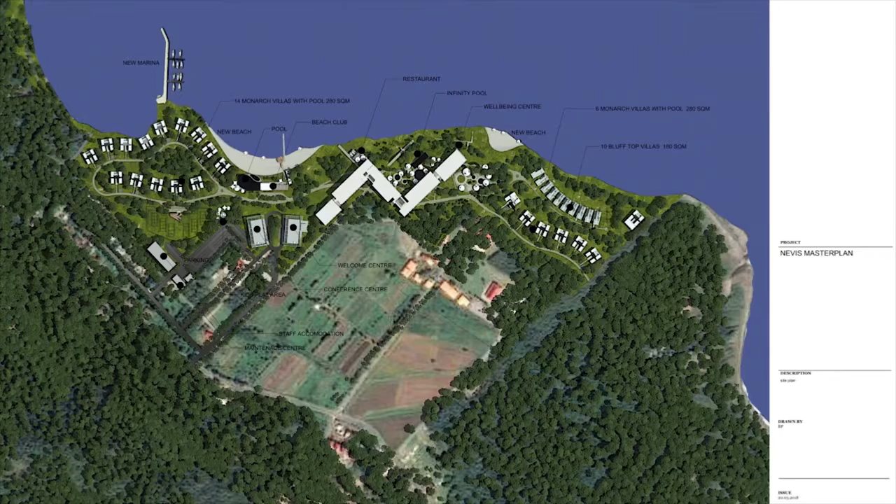This is the project in Brooklyn. And we're also working on a project on the island of Nevis right now, which will be, as Michael mentioned, the first 5-star modular hotel in the world as well—a project called the Nevetian. There it's about a 160-key hotel, as well as hybridly built modular villas that are going to be half built on site and half built modularly. You can see that project right there.

And I show this just to wrap things up to make the point that these are very large and very fancy rooms. These are 5-star rooms. In some cases we're combining 3 modules together to create very elegant suites with kitchens and large bathrooms and moving walls and balconies and outdoor spaces and plunge pools as well. It's crazy, it's really interesting, but my point is that you are not limited by any means. The technology doesn't determine what you build or how you build it—the technology is wildly flexible. It just takes an insane amount of coordination to get it done.

I would say this—people always ask, is it cheaper, is it faster, is it better? It's all of those things if done right. It's an unmitigated mess if it's not. We don't have that many feathers in our cap at this point to say this is the holy grail. It will be, but it will take time. It will be all the more effective when we have domestic manufacturers in America.

I spoke last week at the Build America Summit in DC at the Library of Congress with Congressman Donald Payne and Elijah Cummings, who are very engaged in looking at ways to bring subsidies in America to find ways to bring manufacturing back to America. Modular is an area where there's a ton of excitement about it. So there's a groundswell of activity, people are talking about it. It will require developers and folks in this room to support this effort, because at the end of the day, it gets better for all of us if we all do this and work hard to succeed at that.

So with that, I'm going to pause and take any questions. In terms of the design phase, at what point have you settled on which company you use for technology?

Very, very early. When we decided to flip the building to modular, we basically paused the job, took almost a 6-month due diligence phase where we looked at all the projects I showed you today. We met with all the manufacturers, all the fabricators, and once that decision was made, the general contractor and the modular fabricator were selected at the same time. So there's no bidding, it didn't go that way at all. It was a deep due diligence phase, and a decision was made. Then at that point, it's basically IPD, Integrated Project Delivery. Your architect, your GC, and your modular manufacturer are a team. We don't say design build in New York City because it's not legal, but in practical terms, it's a design build job.

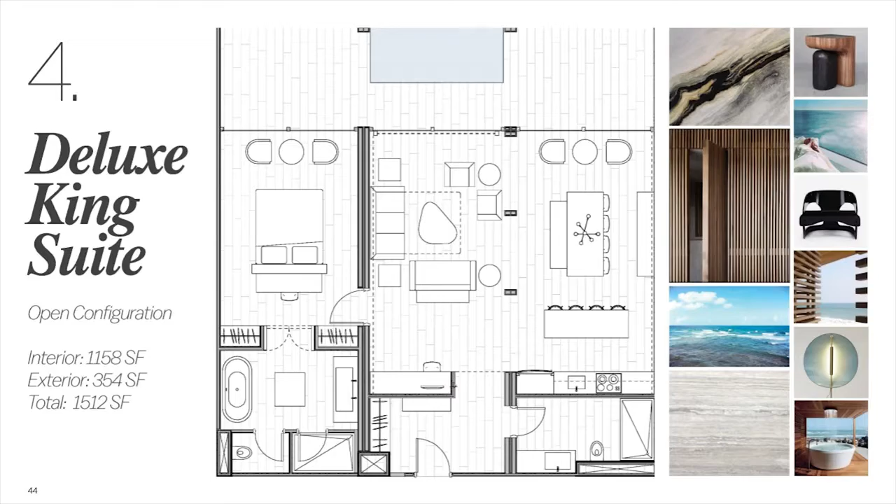Sure, what are the challenges with manufacturing in the States? Is the modular that's being done - wood - are those the same facilities that will be... No, they're not going to be. Some of the big wood guys are likely going to be acquiring some of the steel factories in America, so we'll see what's going to happen. So, are you asking about overseas? Well, I'm asking how soon do you think we'll see that manufacturing in the States?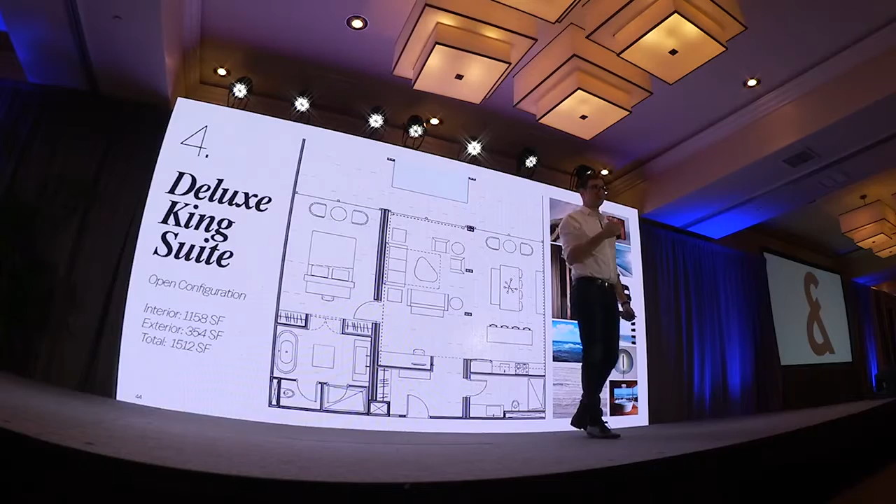Well, there are companies - there's Full Stack in Brooklyn, there's Deluxe in Pennsylvania, there's a company in Austin. There are modular companies right now in America doing volumetric steel buildings. They exist, they haven't gone very tall yet, and things get tricky when you get tall. So it's not that they can't do it - I'm sure their brochure says they can go to the moon.

You know, the question is, are you going to put your money down and feel comfortable? So it's about building that skill set. They're here right now. Citizen M can speak to why they went to Poland, we can talk about why we went to Poland, but I think it's happening now because there simply isn't the comfort level, but my sense is that's changing every day. You can ask yourself the cost savings on labor relative to the cost of shipping - that's a huge number you've got to make up, which at this point it does pencil. But very, very soon that's not going to be the case.

What's the warranty like when you look at all the trades combined within a modular unit? At the end of the day, it's no different than you require the same things of your FF&E providers, your ID providers and your GCs as you would in a regular project. So there's nothing different in that regard. You have to structure your contracts the right way. We were very fussy in our project to make sure that the general contractor is the modular fabricator, that they're one and the same, that you don't have GCs and subs in that respect, which at least helps in terms of finger pointing and responsibility matrices. But at the end of the day, it's a GC who's delivering our product.

Assuming all of your coordination goes as it should, how does the cost compare to conventional? I think everyone has a different statement about this. At this point in time, if we can be cost neutral and faster, that's my goal. I would say there are qualitative value adds that may not be obvious. Let's say one: on our project, 80% of the real estate is modular. You have price certainty on that at a very early point in the process. So in terms of your budgeting process, if you look at our building, the podium's 8,000 square feet, the tower's 75,000 square feet - we know the cost of that.